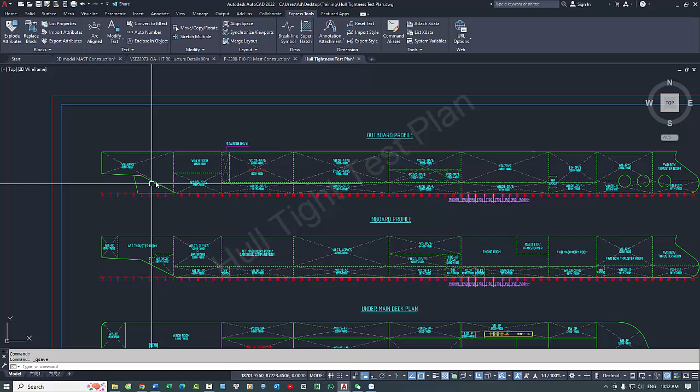A hull-tight test plan drawing for a ship is a critical document used to ensure the watertight integrity of the vessel's hull. This drawing outlines the procedures, locations, and criteria for conducting hull tightness tests, which are essential for verifying that the hull is free from leaks and capable of maintaining its structural integrity under various conditions.

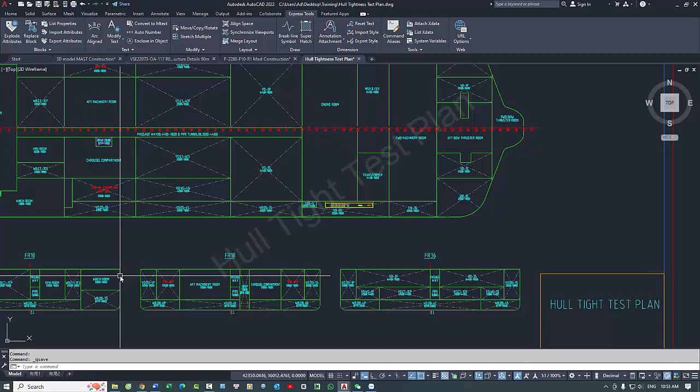The purpose of this drawing is to ensure the safety and seaworthiness of the vessel by preventing water ingress, which could lead to structural damage or sinking. The hull-tight test plan drawing typically includes the following information.

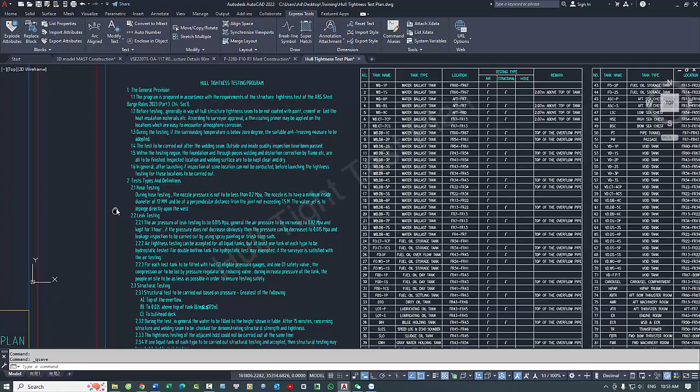1. Test locations. Detailed identification of specific areas on the hull that need to be tested. This includes seams, joints, welds, bulkheads, and any other critical points that could be potential sources of leaks.

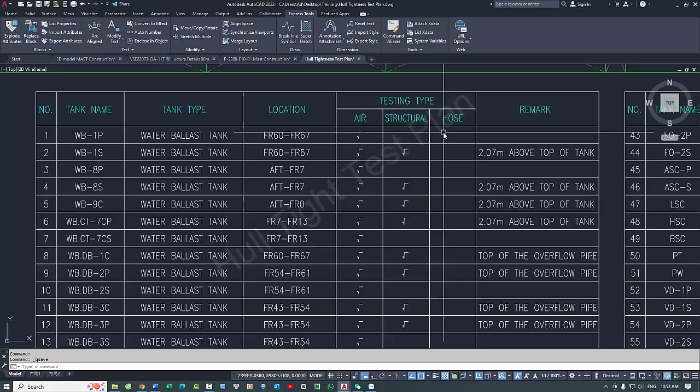2. Test methods. Description of the methods to be used for testing, such as air pressure tests, water pressure tests, vacuum box tests, hose tests, or ultrasonic testing. Each method's procedure and the criteria for acceptance or failure are specified.

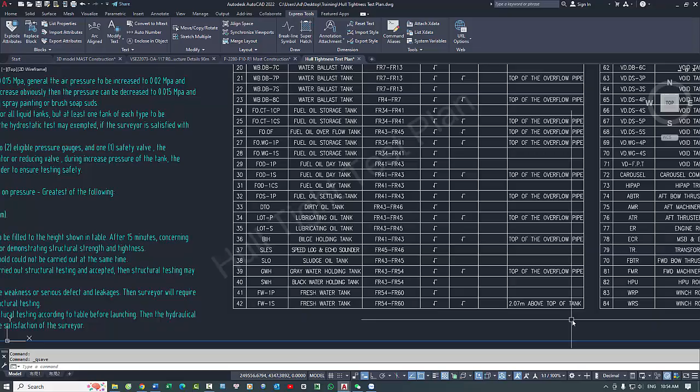3. Test equipment. Information about the equipment and instruments required for conducting the tests, such as pressure gauges, vacuum boxes, hoses, and sealing materials. 4. Test conditions. The conditions under which the tests should be conducted, including environmental factors like temperature and weather, as well as the state of the ship, e.g., afloat, in dry dock.

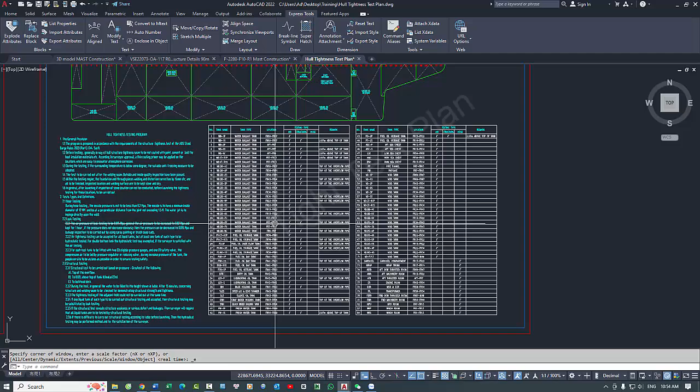5. Acceptance criteria. Clearly defined criteria for what constitutes a successful test. This may include acceptable pressure levels, allowable leak rates, and specific guidelines for retesting if initial tests fail.

6. Safety precautions. Instructions on safety measures to be followed during testing to protect personnel and equipment. This includes guidelines for handling pressurized systems and dealing with potential hazards.

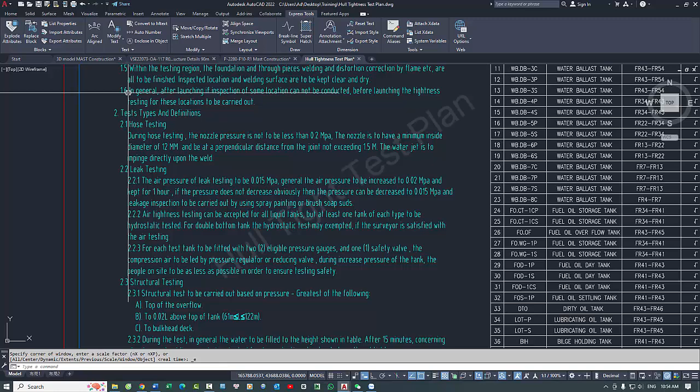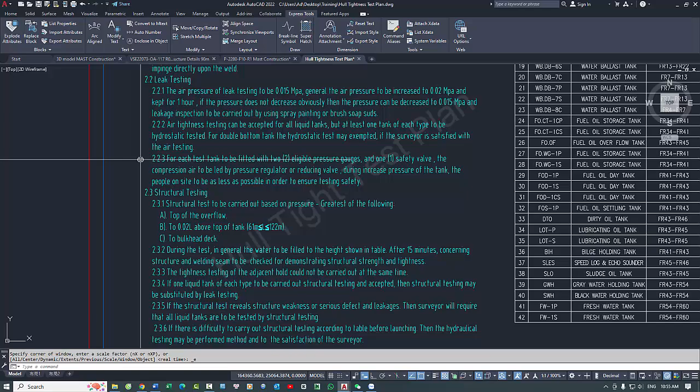7. Documentation and reporting. Requirements for recording test results, including forms, checklists, and any other documentation needed to verify that tests have been conducted according to the plan. This also includes procedures for reporting and addressing any deficiencies found during testing.

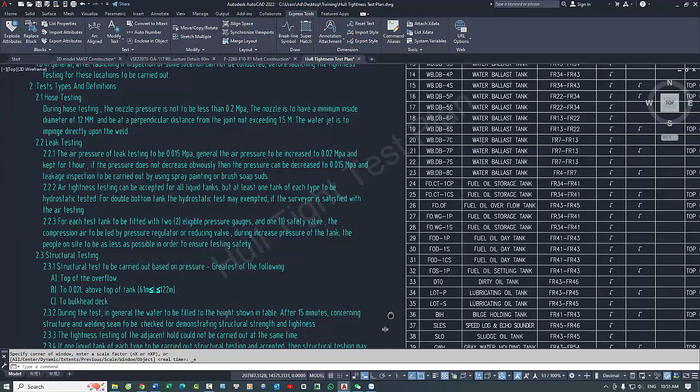8. Responsibilities. Identification of the personnel or departments responsible for conducting the tests, supervising the process, and ensuring compliance with the test plan. The hull tightness test plan drawing serves as a comprehensive guide to ensure that all aspects of the hull's watertight integrity are thoroughly examined and documented, contributing to the overall safety and reliability of the vessel.